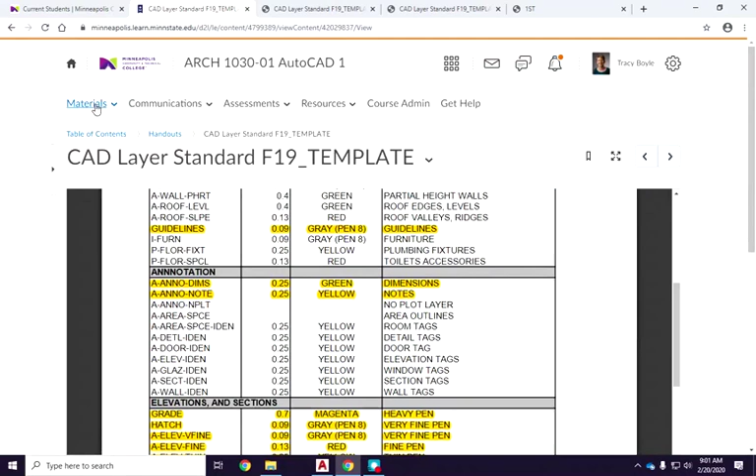All right, good morning. It is Thursday, February 20th. Just a reminder, Tuesday is the 25th. We're going to set aside our building section for a minute, and we're going to put some text and dimensions in.

Tuesday, there are no regular classes. The lab will be open. I said this was going to be a catch-up day, except that at 9 o'clock I have another group of students and we're going to do some virtual reality stuff in here. You are welcome to be in the lab the entire time, but there are no regular classes.

What I want to point out is there's something that has not been well advertised - the Annual Student Conference. This guy is the keynote speaker. He is speaking at noon in the cafeteria. The keynote speakers are usually great, very good speakers, people who have done it before. They're worth listening to.

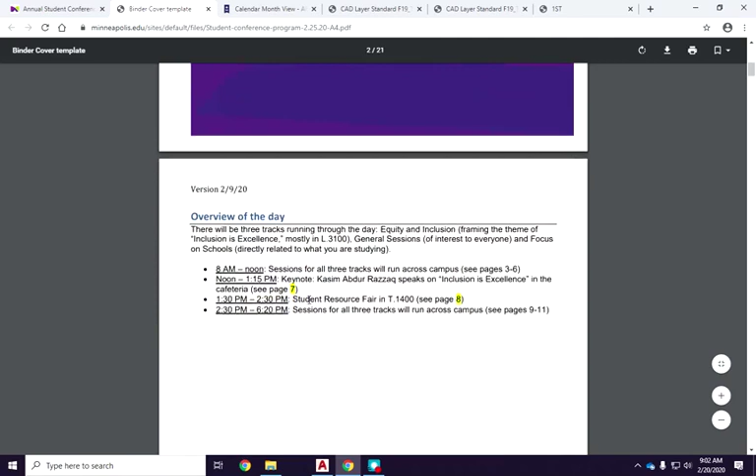This is the whole catalog of things to do that day. There are all sorts of seminars, some related to school, some completely unrelated. If you're interested, for instance, in CNC machining, which is a sort of CAD but a different direction of using CAD for manufacturing things, they have a demonstration down in the basement. If you want to learn Excel, if you want to go on a tour of the library - I'm doing the virtual reality thing at 9 o'clock. Math is beautiful - I'm not going to that. Budgeting for success, self-care - there's some cool stuff over in the art department and the graphics department.

So you can scroll through this and see all the different things you might want, like managing test anxiety. There are full descriptions in the catalog after that if you really want to know what they're doing in any one of those.

I will have little pieces of paper. If you take a piece of paper, go to one of these seminars and have the speaker sign it, I will give you extra credit. So that's an easy way to get extra credit. Don't come to my seminar because you're going to get my seminar some other time in class - I want you to go to somebody else's seminar.

So that is Tuesday. Questions on that? All right.

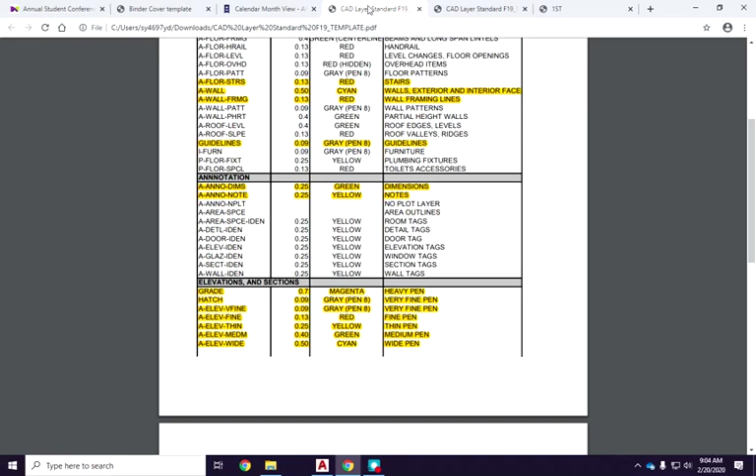While I talk now, please open up your first floor plan. Make sure you have these two layers, not the one that says no plot, just these first two. So go ahead and add those two layers in.

You might already have them, or at least one of them, from what we've been goofing around with. Hopefully everybody can smoothly find where to put layers in. You're going to layer properties, which is about in the middle of the screen in AutoCAD. You pick on the little icon with the sunshine for new layer. You're going to name these A-ANNO-DIMS.

Guess what goes on that layer? Dimensions. And A-ANNO-NOTE - notes go on that layer. In our business, the difference between dimensions and notes: notes are text where I'm going to tell you what something is or what I want you to do with it. A dimension is where I'm going to tell you how big something is and where it goes. Dimensions have numbers in them, notes are text. We put them on two different layers so that we can turn things on and off depending if we want to see those or not.

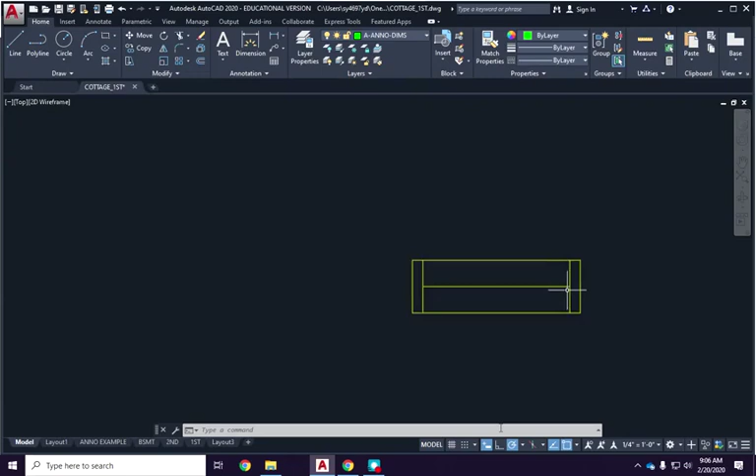He is a block, and his frame is 1.5 inches. He's 7.5 inches deep. I do not just want to edit this block, because if I edit this block and make it skinnier, 5.5 inches, then every single window is going to change to 5.5 inches. So I'm actually going to explode this guy.

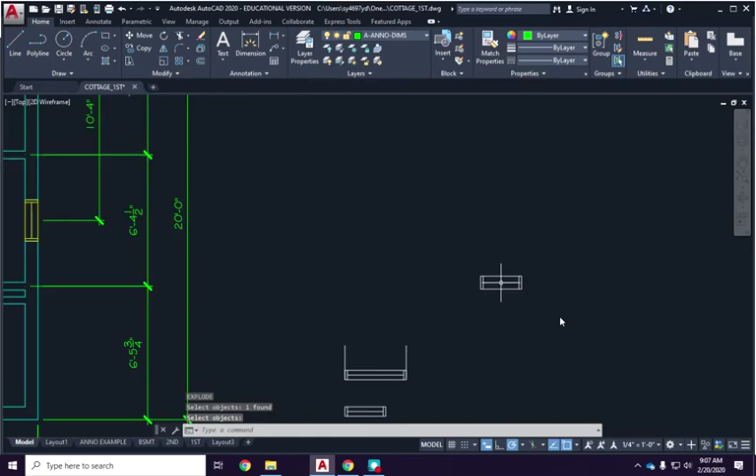X for explode. And if you want to do this at the same time I'm doing it, that's fine with me. So I'm going to explode him, and he should turn from yellow to white, and he becomes individual objects. All right. I'm just going to put a little dimension line in here for a moment so you can see what I got. That guy goes there. Okay.

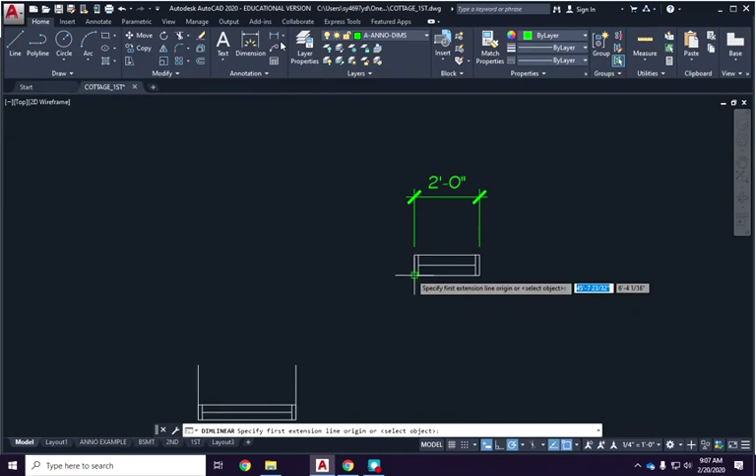That is a 2 foot wide window, and he is 7.5 inches, and we want him to be 5.5 inches. So the quickest way I'm going to do this is I am going to stretch. Stretch sort of implies making something longer, but I'm going to make it shorter. There's not really a word called squish, but if there were, that's what I'm going to do. I want this line and all this stuff up here to stay where it is, and I'm going to stretch the bottom half of these two rectangles and this line upward 2 inches.

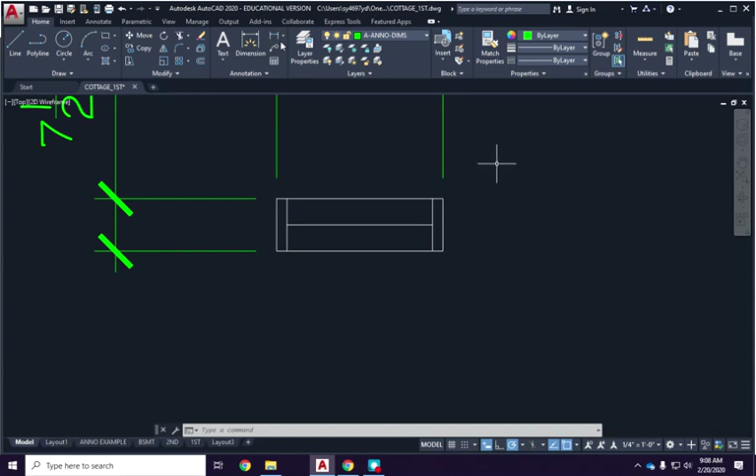The shortcut for stretch, I do not even know if there's an icon up here to do it. I have never used it. So S for stretch, enter. The trick is stretch works about 95% of the time. So S for stretch, and now I'm going to grab stuff, but I cannot just click on it. I cannot do this, this, and this. It won't work.

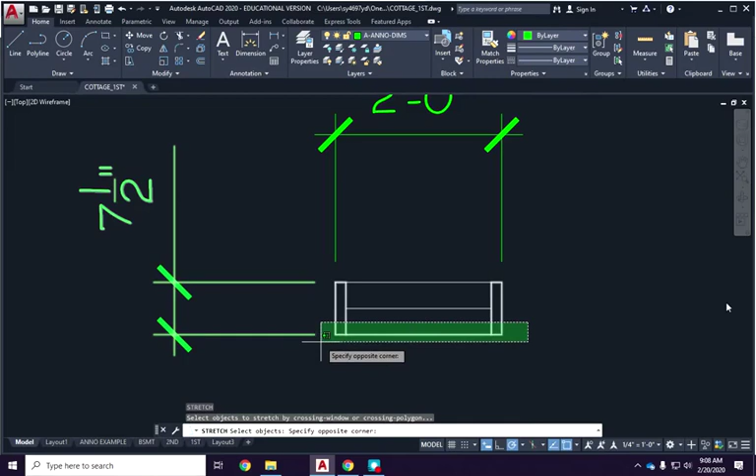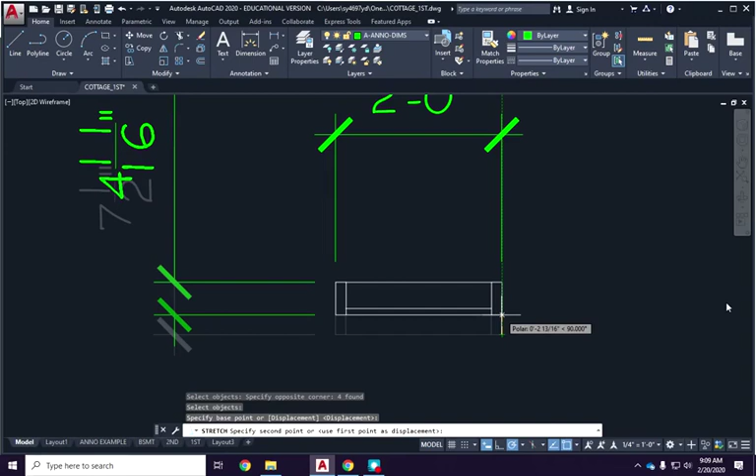I'm going to select it using the green crossing window. So I started on the right, I left clicked and went to the left, and that's how I selected those four things. Now I hit enter because I'm done selecting objects. I'm going to pick my base point, which is anywhere on this window, and slide it up, and notice the dimension on the left is changing. I'm going to type 2, and now it's a 5.5 inch window, and now I'm just going to move that guy to the middle. Now you have a shorter window.

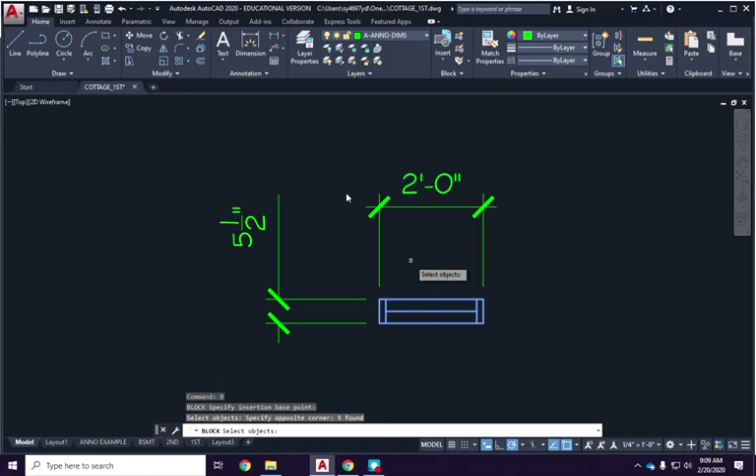I'm going to type B for block, window 24 bungalow. All I'm doing right here is making the block. This is the same process you guys have done 47 times. Pick my insertion point right there. Make sure it says retain. Select my objects; now I can use the blue crossing window. Don't grab the dimensions, and say OK. This thing is still just an object.

Lisa, I'm going to go ahead. What's your question? Too long of a discussion now. It'll be fine. If I can, in a couple weeks, go back and explain what I'm doing and why, but I would say don't worry about it for now.

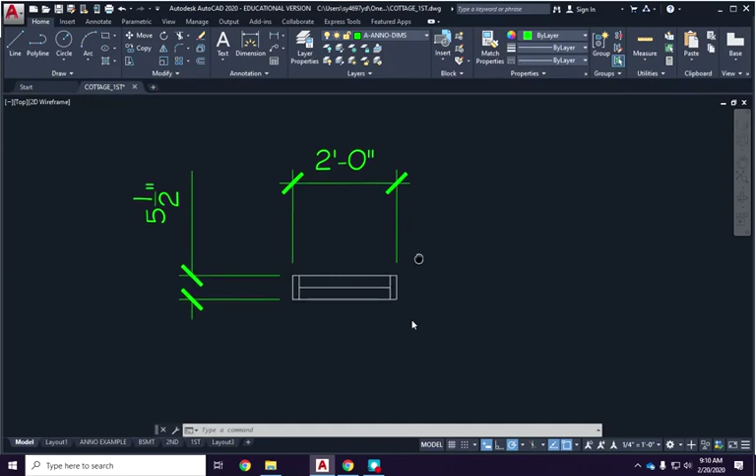Oh, I screwed up two things when I made this block. What layer should I be on? 0. And what should my annotation scale be? 1 to 1. Okay. Luckily, it's not going to hurt me. Notice how my dimensions went away? This is what we're going to learn today. Because my objects were already on layer 0 when I made my block. If my objects had been green or yellow, I would have had to start over.

Okay. I'm going to do one more thing because this is a window now that's 24 inches wide. Anybody remember another width of a window you have for Doug? Do you got a 3 foot wide window? Or maybe a 28 inch window? I'm just going to copy this guy over, slide him over. He's still a 24-inch window. Let's say Doug's got a 28-inch window.

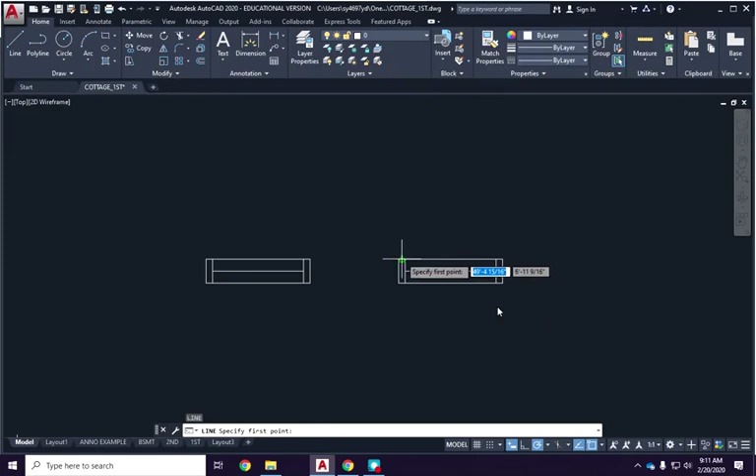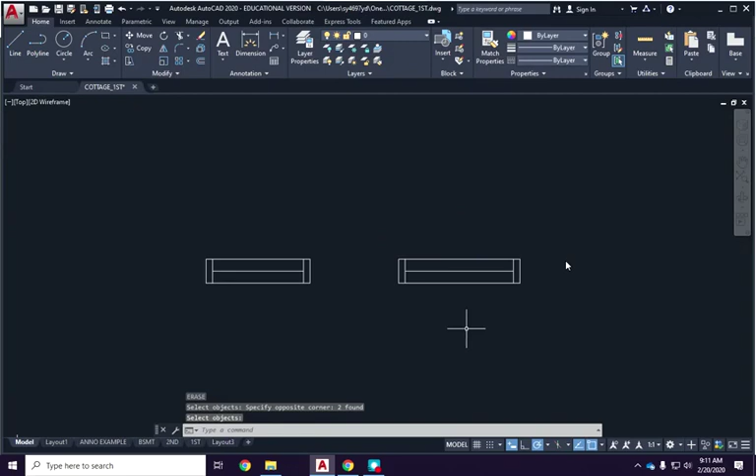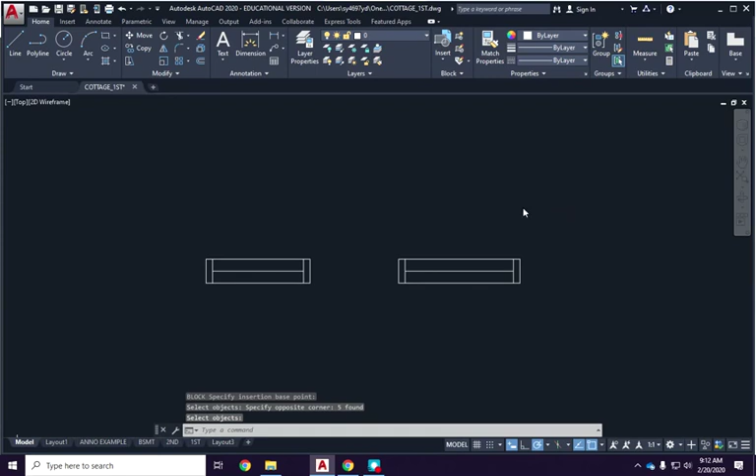I'm going to draw a line. This is just a guideline. Offset it 28 inches. That's just a helper line. S for stretch. Now I'm going to grab these guys using the crossing window. Grab the corner and go there. Erase my guidelines. B for block. Window underscore 28 underscore bungalow. Pick my insertion point. Say retain. Select my objects. Enter and OK. So now when I go into insert my blocks, I for insert.

Where are they? They are window 24. These are the ones you made for me the other day. Oh, there's the one I just made now. That's the 28 for Doug. So notice how I can't see all the text here. It's not very helpful. If you come over here to this down arrow, you can go to medium size icons, small icons. Oh, I like this one. So you can now see the names.

Anything that has this gobbledygook, $C, that's a mistake I made. And I'm going to actually try and get rid of it. Select it. Oh, I don't want that. I'll figure out how to delete it later. But you can change how these guys show up so it's easier. Oh, look at that. There's a list. That might even be more helpful. So don't be afraid to play around with these.

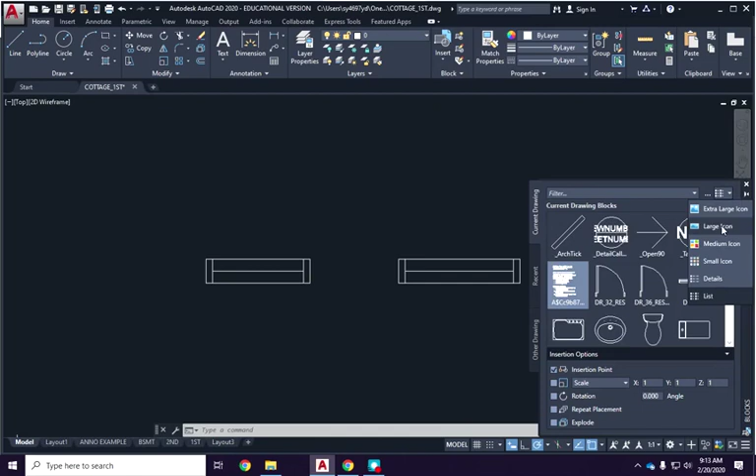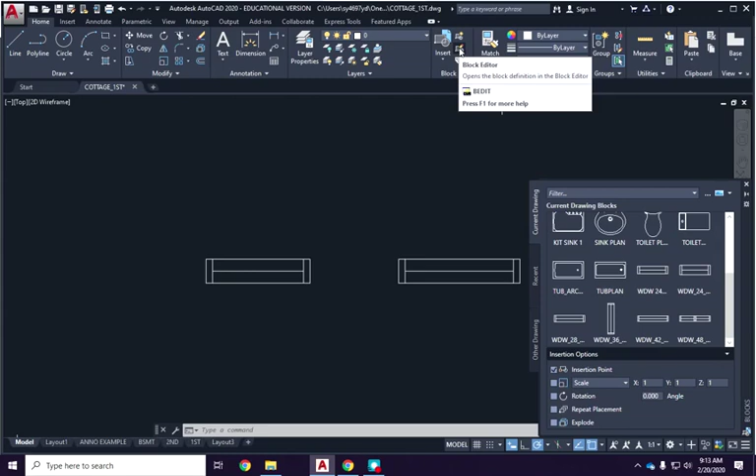One other thing. When you're looking at this, all your blocks should be white. If you have a yellow one or a green one, it means you made it in the window or the door layer, and that is a no-no. So if you had this guy yellow and you need to move him, you can go into the block editor, and that is this. I type BE. You can also come up here to this little guy, and he says, what one do you want to edit? And I'll say, I need to edit window 28 because it's in the wrong layer.

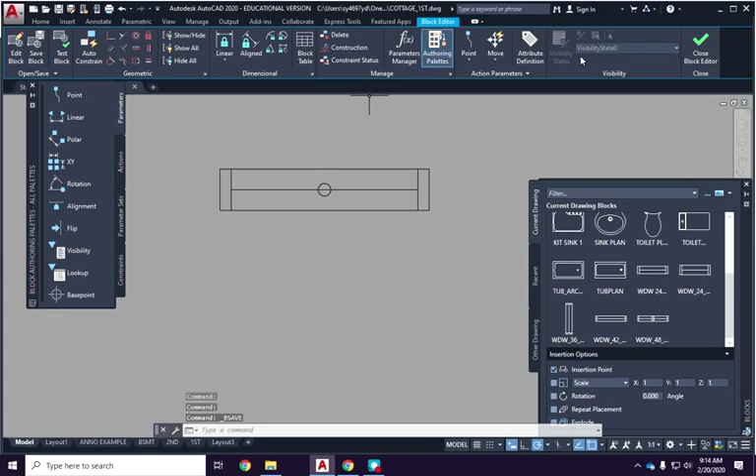I say, okay. I am going to go over this process again and again because we haven't had a lot of time to play with it. But now, notice how my background is gray. That's a signal to me you are not in the drawing, you're in the block editor. I can do whatever I want to this one. So I'm going to put a little circle in the middle. And I'm going to save it. And I'm going to close it. And it says objects that don't support the current edit, blah, blah, blah. And now it is updated. So that's the block editing process.

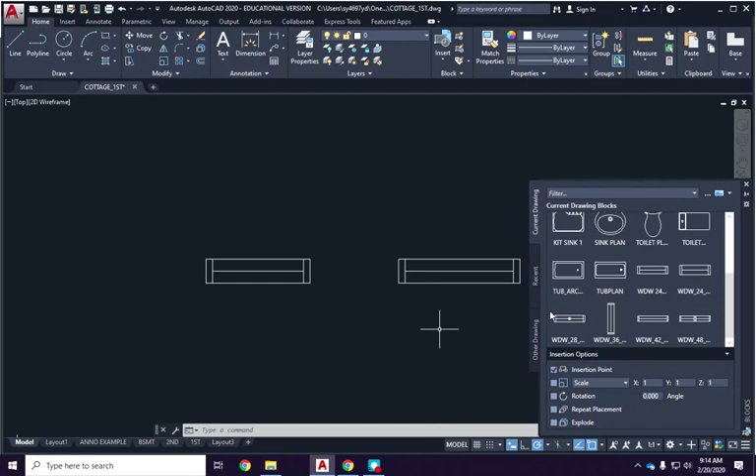Does anyone have Mac, and is that how it works on Mac? No, it's not how it works on Mac. Okay, so the Mac support group will be meeting after class for a big group hug.

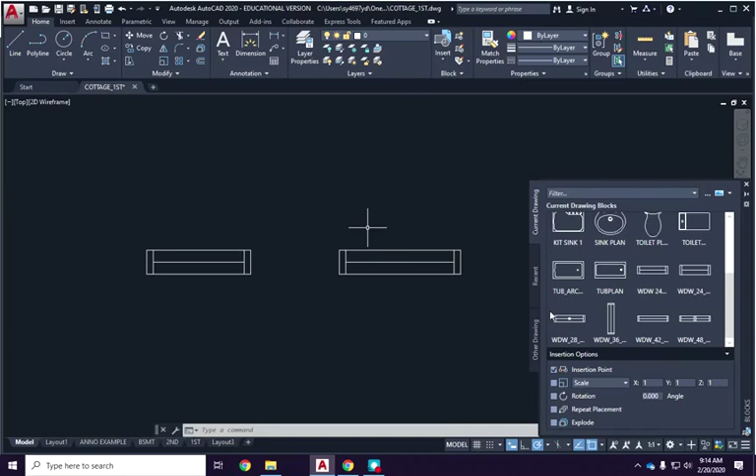If you use my keystrokes, for people who are on Mac, it's the icons I can't find on your Mac. Your keystrokes should do the same thing. For the most part, thank you. Okay. So our facilitator for the Mac support group will be Andy for today. So, Andy. All right. What was your keystroke?

For the block editor, BE. But in PC, what was the command to get it to change its layer? I just selected it. When you go into it, you can double click on things and it'll show you the layer, or you can go on layer, yep, not that one, layer properties. I can change it. So we can do that separately. Okay. So that is on our list of things to do today. Bungalow window. I wanted to show you how to quickly change those windows for those of you in Doug's class.

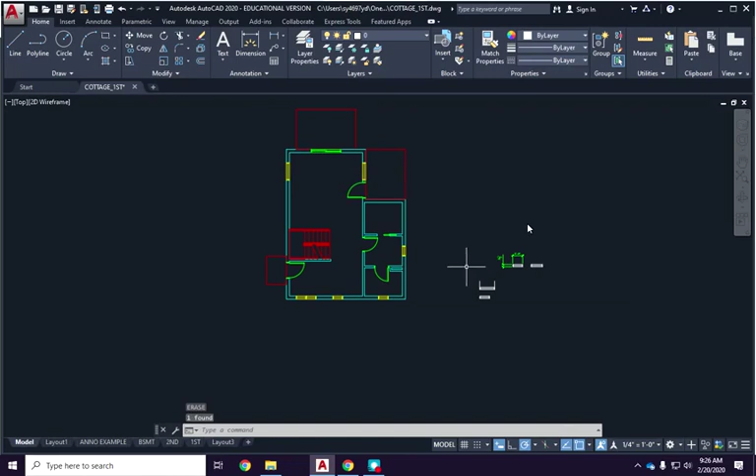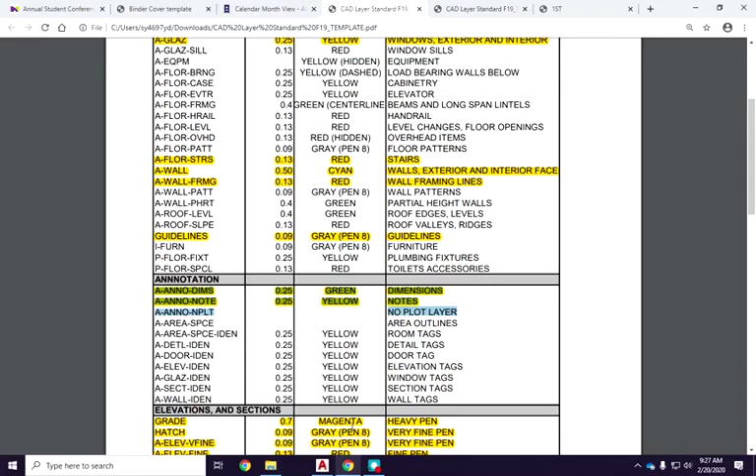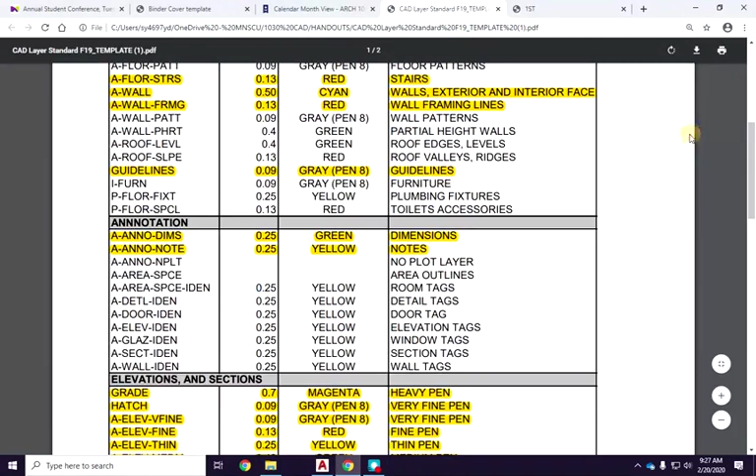I'm going to delete everything on my screen, and I want you to switch to layer A Anno Notes, because we're going to put some notes on. All right, where are you? Here. I had one with the plan on it. Oh, there we go. Okay, so this is the floor plan with the dimensions.

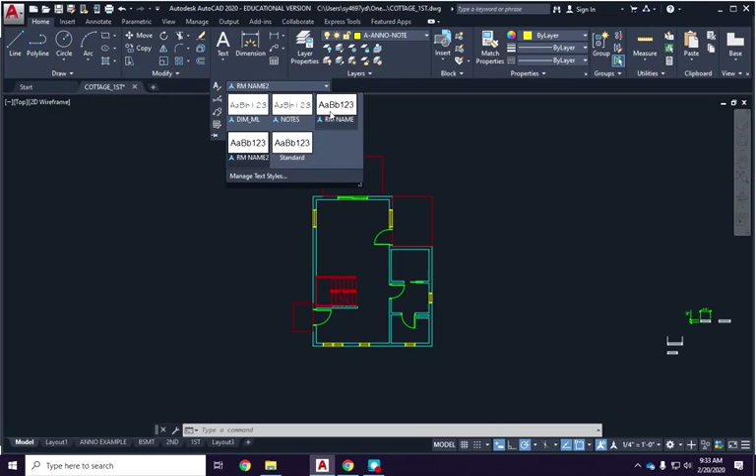Room name 2. Oh, I'm supposed to be creating. There we go. 3/32, room name, Arial. Make sure it says annotative. I'm sure yours will. If you unclick annotative, you lose the little triangle and he becomes stupid.

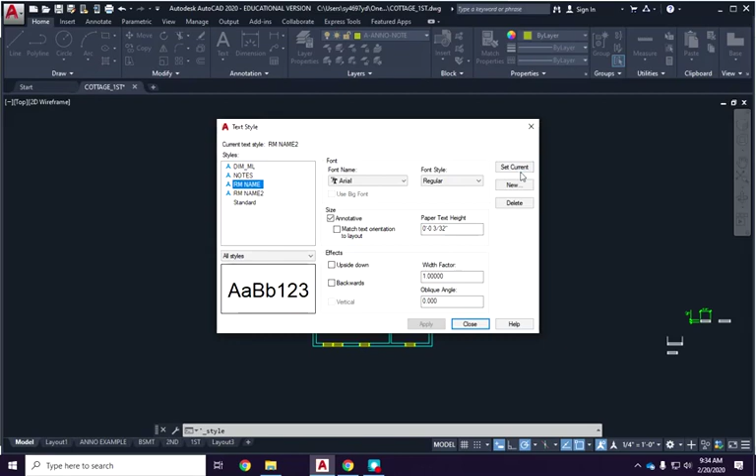So we're going to click on annotative, which means he's going to respond to your annotation scale in the lower right corner. And now you can say set current, or you can do new and make a new one. We're going to say set current. I'm going to switch to my room name one. Set current and close this. And now when you go to your down arrow next to annotation, you will see yours should say room name. Got it? Okay. Now we are ready to put in text.

There are 2 types of text. If you come over and just hover over your A with the word text underneath it, it says multi-line text. If you click the down arrow, there's actually an option for single line text. I never, ever, ever use single line text. It has very few options for editing it.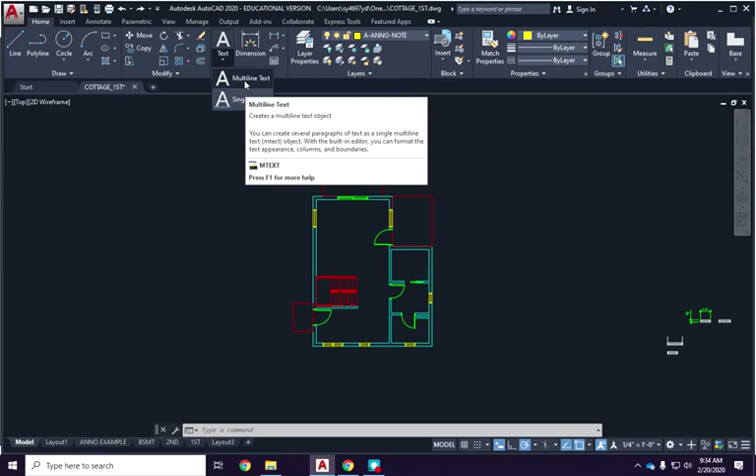If you use multi-line text, you can edit this thing almost as much as you can edit a Word document. You can put bullet points and numbers and tabs and all sorts of cool stuff. So I don't use single line text. If you accidentally click single line text, it'll be the letter with the blue line under it. You don't want that. You want multi-line text. Okay. So I'm ready to put my text in.

I click on the A, and then he says, specify the first corner.

Lisa, everything cool? Okay.

Specify that you're just drawing sort of a text box. Like if you have done other graphics programs, it's like, where do you want your letters? You're just drawing a box. So when it says specify first corner, I'm just going to pick a box in the middle of my living room, left click, draw a little window, left click, and then he says, what do you want to say?

And if you look at the top, your dashboard completely changed. You can center justify, you can switch, I don't switch my text styles here, but you could. You can do bullets, you can do numbering, you can do columns, you can put symbols in, the little @ symbol, plus and minus, all sorts of funky stuff. All I want you to do right now is type the word living room using all caps.

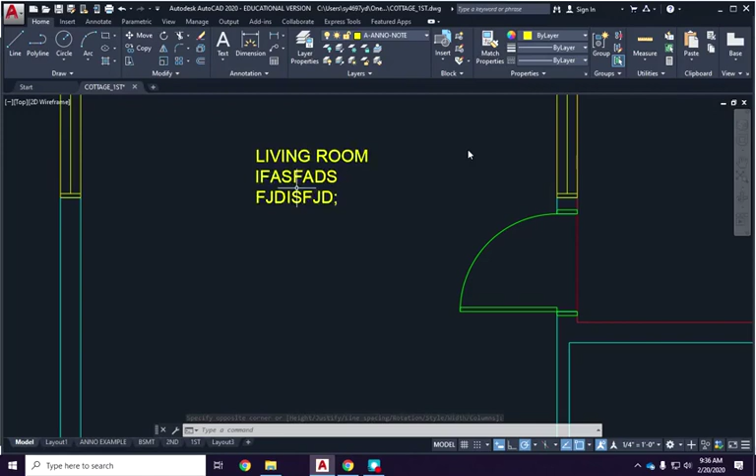The nice thing about multi-line text, before you hit enter, if you hit enter, he thinks return. So if you hit enter, living, he'll just keep going. So don't hit, you have to actually click outside the window to get him to stop. So now I have some gobbledygook in here that I don't want. I'm going to double click on him. Come on. And I can come back, highlight this stuff, and delete it.

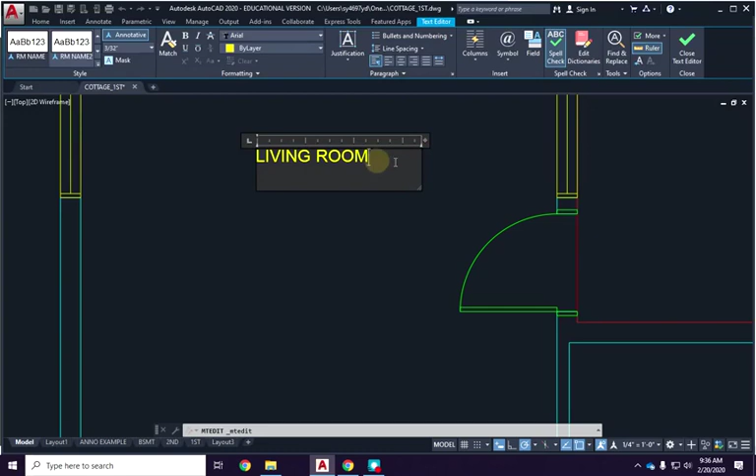The other cool thing I can do is you can grab the ruler and he will automatically stack. If you want to say living room with lots of carpet, and you go, oh, I don't want it in 2 rows, I can double click, grab it, and I can get it in 5 rows, 6 rows. I can do all this kind of stuff. This is what multi-line text allows you to do, is play around with this stuff.

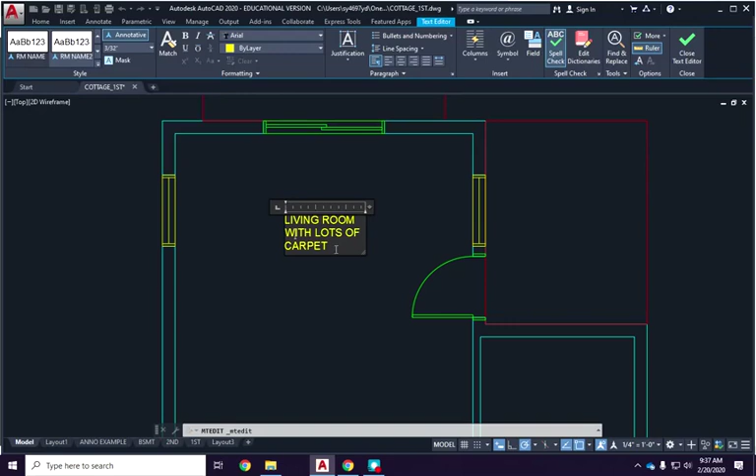So what I would like you to do is go ahead and put the rest of the text in the dining room, bathroom. Let me see if I can call up the picture so you know what you're doing. So mechanical room, laundry room, kitchen, bathroom, dining room. Go ahead and put those 5 other pieces of text in there. Oh, you can add porch and stoop and porch up here as well. So I'm going to see if I can get this whole thing to fit on the screen.

Yes. It becomes like a little tab that you can view after. Okay, thank you. You're my next.

Where'd you go? Where'd you go? No, no, no, no, no, no.

What? Where? How do you select the scale? What scale do we want to be in? Should it be one of them? 1/4 inch. Oh, 1/4 inch, and that is not. And these are the guys - do not touch any of these. These are yucky, terrible ones. 1/4 inch is down there.

Now try putting them in. There we go. Feel better? Did everybody get it to show up?

If you were at 1:1, your words 'living room' are there. They're just really, really small. They are literally 3/32 of an inch tall inside this big cabin, which is 30 feet by 24 feet.

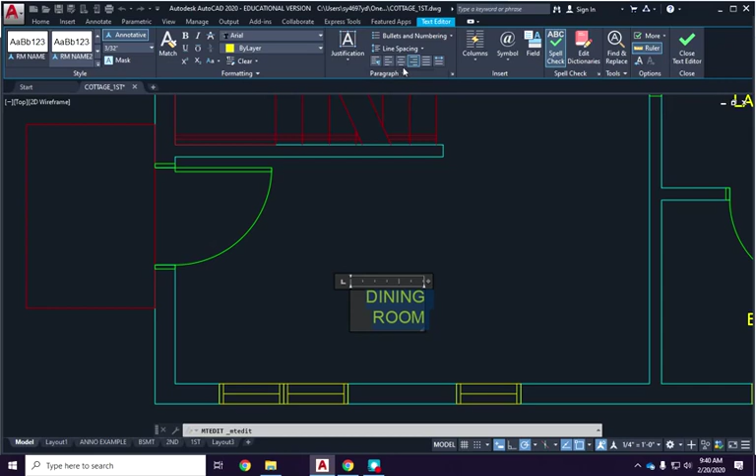If I highlight them both and go that way, they are right justified. A lot of times for room names - this is really anal retentive - I like my stuff center justified so they stack right over each other. If you spread them out, you can't tell either way, but that's getting nitpicky.

But all right, we're going to do some dimensioning. Now's a good time to save. Control S.

Okay, I'm going to go back to my handout. I hope you have this handout with you, but it doesn't really matter because you should be able to do 80% of this without the handout.

Dimensioning is an art, not a science. Everybody's going to dimension a little bit different than everybody else. I'll tell you the general rules, but if you look at my layout, you'll go, well, she broke her own rules. So, sorry.

Generally, we dimension the furthest out, so these are all your dimension lines, also called dimension strings. We dimension the furthest away from the building as the out-to-out of the entire building. So I'm going to dimension, my first string is going to be this 24-foot dimension, going from outside corner to outside corner. The next dimension string in, over to this side, is going to be wall to wall.

Remember when we located the wall between the mechanical room and the laundry room? Those are going to be my next two dimensions, and then I dimension windows further in. So this guy down here sort of kind of follows my rule: 24 feet, he's the furthest one out. And then I went 10, 4 and a half. Then I went middle window, middle window, middle window.

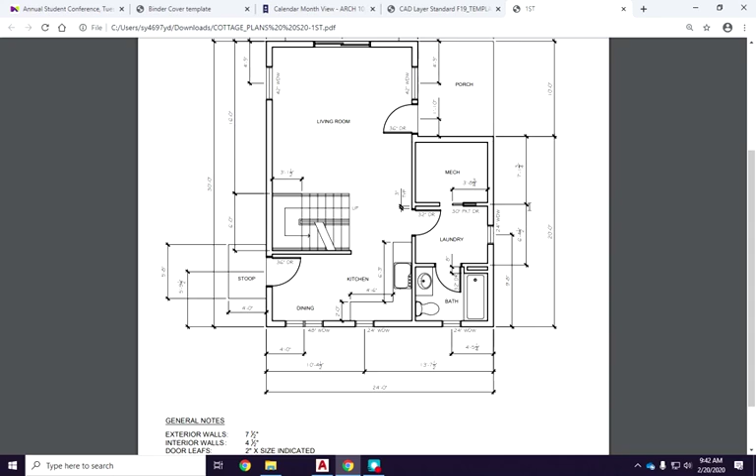What I'm going to have you do, I'm going to show you a couple of techniques. Please note that whenever possible, I line up my dimension strings - nice, neat, and tidy. So if you look right here, you'll notice that the 10, 4 and a half is right parallel with the 13, 7 and a half. And the 4, 5 and a quarter, if you draw a line all the way over, lines up with the 4 feet. A neat, tidy drawing is a credible drawing.

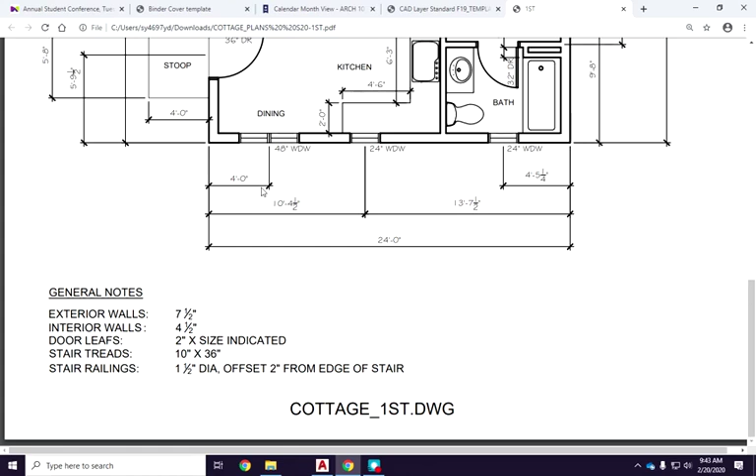If your drawing looks messy, people reading your drawing will think that you don't know what you're doing. If you can't draft neatly, maybe you can't design neatly. So a neat, tidy drawing is a credible drawing. That's why I get really anal retentive about lining things up.

So I'm going to switch back here. Please switch to your A-ANNO dimension layer.

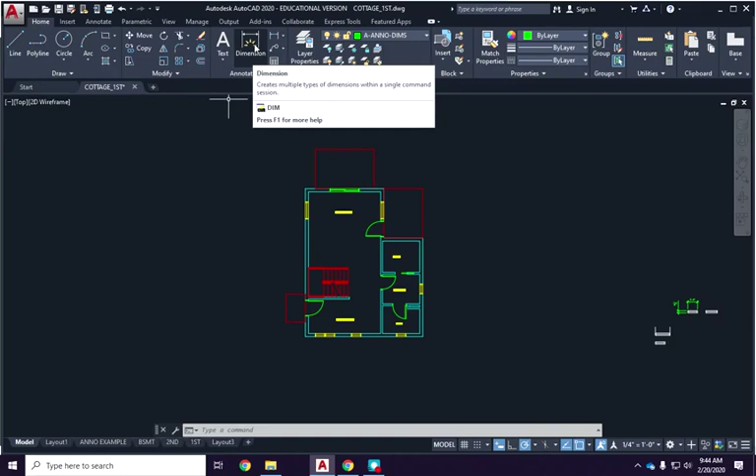So now everything going in should be green. This little dimension with the sunshine on it is very seductive, but I don't use it because I find that you don't get as much control. As you put the dimension line in, it disappears from your screen, so you can't really see where you're clicking. Go ahead and play with it, but I find it frustrating and not helpful. It's new, so somebody at Autodesk must have thought it was a good idea.

The one that I use up here is this little guy in the upper right corner, Dimension Linear. The shortcut for that, for you Mac people, is DLI for Dimension Linear.

I'm going to go click on this guy, and I'm going to start on the very bottom corner, and now is when you absolutely have to have your O snaps on, your object snaps, meaning this little box down here. You're going to go from the outside corner wall, and I always kind of wiggle my hand around so you can see where it started there. Now I go to the far corner, and when I'm on the box, you can see the green rectangle, that's going to be my second click. Now I'm going to drag my hand down and give myself about that much room, because I know I have to dimension to my bathroom wall and my 3 windows. So now I'm going to left click, and I'm done.

I'm now going to dimension to the bathroom wall, and I'll show you a cool little technique, because residentially you go to the middle of a wall and there's nothing to snap on there. There's no little line that's going to help me find that exact spot.

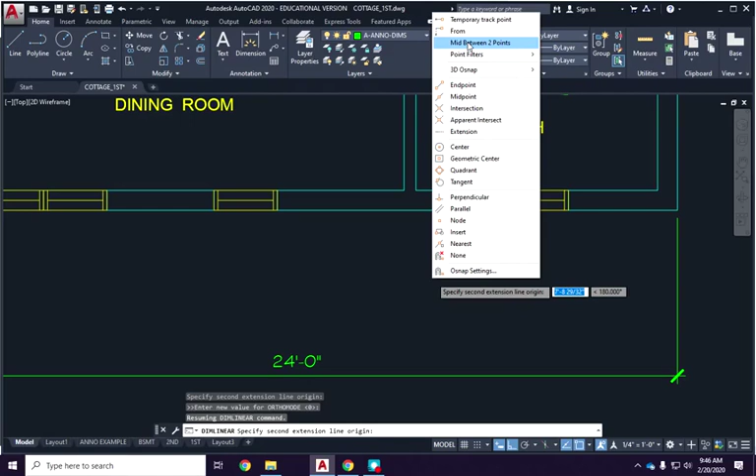So I'm going to go back to my dimension, or DLI. I'm going to start over here, drag my hand over, and now I want to be halfway in between these two guys. So I'm going to hold my hand over here. I'm going to hold down the Shift key, right click, and I'm still holding down my Shift key. Now I let go of my Shift key. The third one down, midway between 2 points. And now I'm going to pick these 2 points, and that's how I got where I want to be. And I'm going to come about there, so I'm about 2/3 of the way from the cottage.

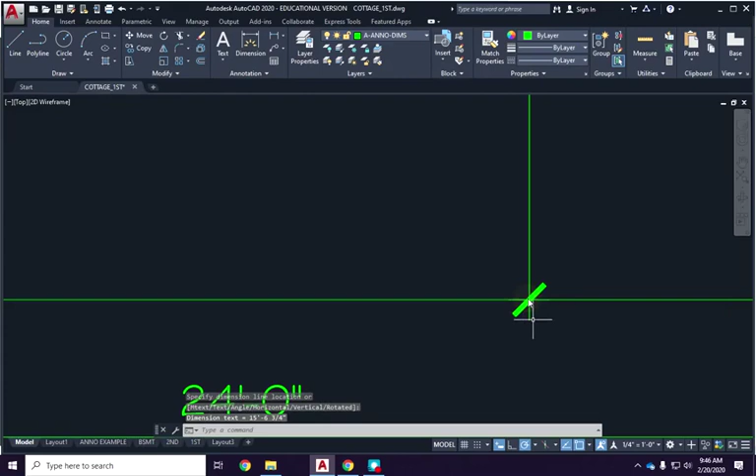And then I can do it when I come from the other side, outside, and I can just snap now right on that little thing. So here's where you want to absolutely snap right on top of the other guy. You can feel it as you're putting the dimensions in that it snaps right to it. So now my dimension strings are perfectly lined up.

And now I'm going to show you another little trick for the windows. So I'm going to go to here, and I click the dimension. You'll notice each of these dimensions comes with a little gap. So when I click here, it sticks to the corner, but when I actually put the dimension in, you'll see this little gap. That is so that the dimension string, when we print these out in black and white, doesn't look like an object. It doesn't look like a sidewalk on the outside of the house or something like that.

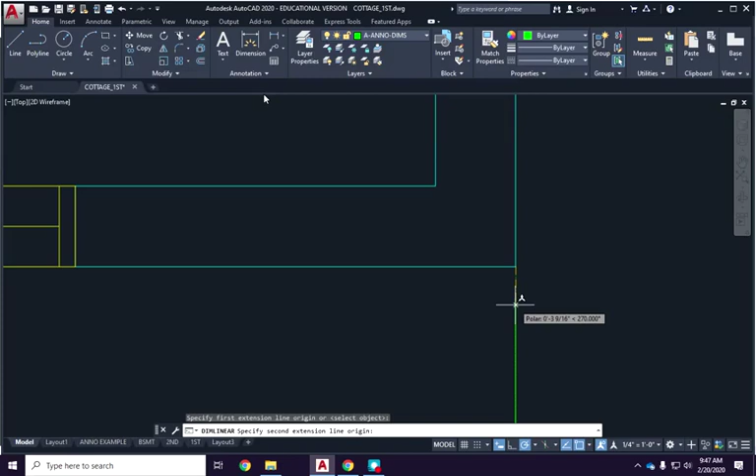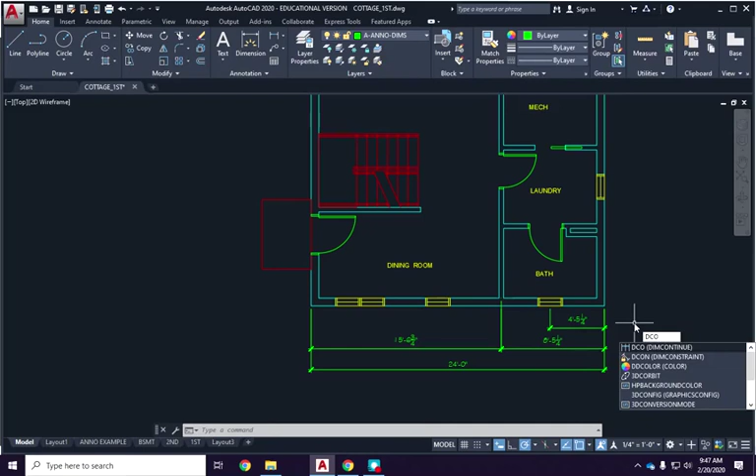I'm going to go to the middle of the window, left click, drag my hand out here, and now before I do anything else, I have 2 more windows to dimension to. I could do that whole process again, or I can type DCO for dimension continue. DCO, hit enter, and he remembers where I was, and now I just click here and click here. Now it asks how far do you want to go, and I'm like, I am done. So I hit escape or enter.

So what I'd like you to do now is dimension the right side of the cottage. Again, your furthest out dimensions are going to be from here to here, and then from here to there. Your second set of dimensions are going to be to the middle of this wall and the middle of this wall. You don't have to worry about this little guy right there, we'll play with him later. And then your third dimension is to the middle of the window.

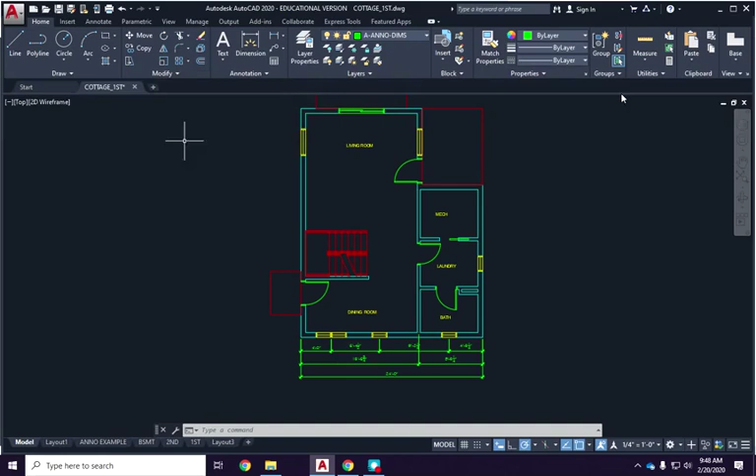And I'm going to save and stop my video and come around and answer questions.